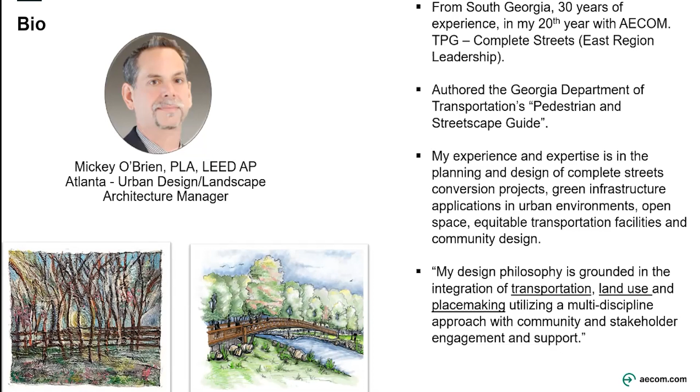and work with communities. So what is a complete street, right? I'm going to just cover a couple of definitions. The US DOT definition is streets that are designed to enable safe use and support mobility for all users. This includes people of all ages, abilities, really all people trying to get from point A to point B.

But I like the National Complete Streets Coalition definition, which is really an approach from the beginning of the planning through the implementation of a project. So you want to be thinking of all users from the very beginning, not just the old paradigm of cars, cars, cars, right?

Even in smaller towns and rural America, across the country, the federal government is funding projects in all types of areas, not just urbanized areas, to develop equitable transportation facilities for all users. Not everyone wants to own a car, not everyone can afford to own a car, and not everyone wants to drive a car. So there is federal money out there, but my point here is it's an approach - thinking of all users throughout the process.

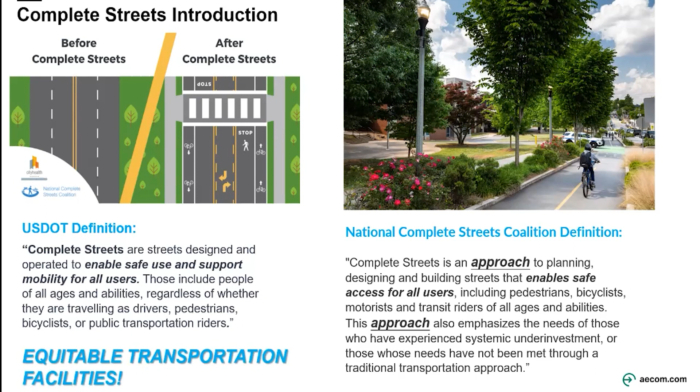Okay, so again, the approach in the process here - is this screen in the way of y'all at the bottom? Okay, there we go. So when developing a Complete Street, you want to evaluate the context, right? As I was saying, land use and transportation work hand in hand, or not. In the past, I think we've missed the bullseye more than we've hit it. But not all streets are created the same, or roads, right?

I mean, we wouldn't be looking at a complete street or a complete road on an interstate, right?

And if you're in an industrial area, you might have a different approach. You've got more trucks and things of that nature. So you need to still provide these accommodations, but you might want to address them slightly differently depending on the context you're in. Industrial, rural, there's an urban context, and there's an urban core context, which is more of larger cities.

You want to conduct your due diligence with your client on the plan developments within the project area, because really all of that feeds into the traffic forecasting. And these projects typically are community driven, community supported, and they're for the community. So you really need to engage the community early on.

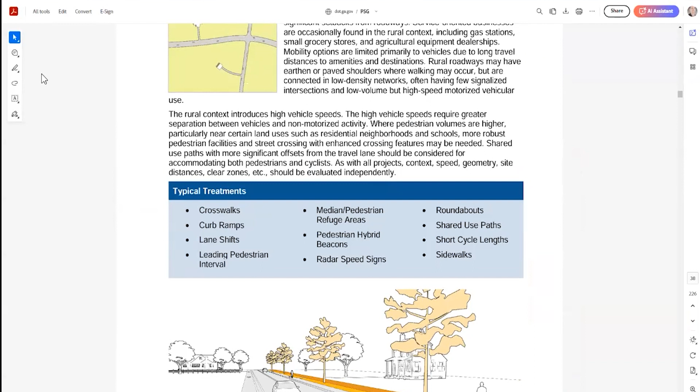And just for a second, I want to show y'all this document here. If you go to Google and type GDOT pedestrian streetscape guide, what you're going to find is this document, and it provides great guidance on the initial steps of creating these multimodal type facilities.

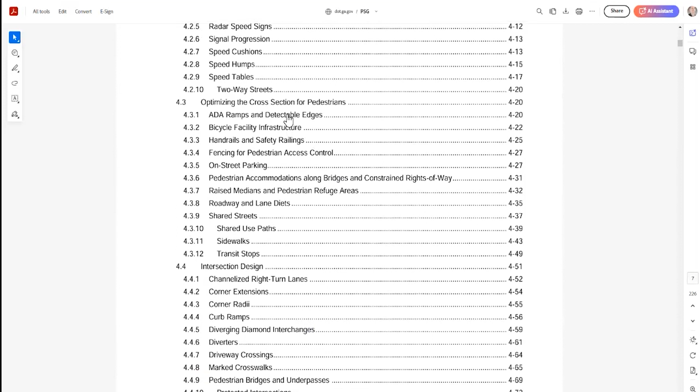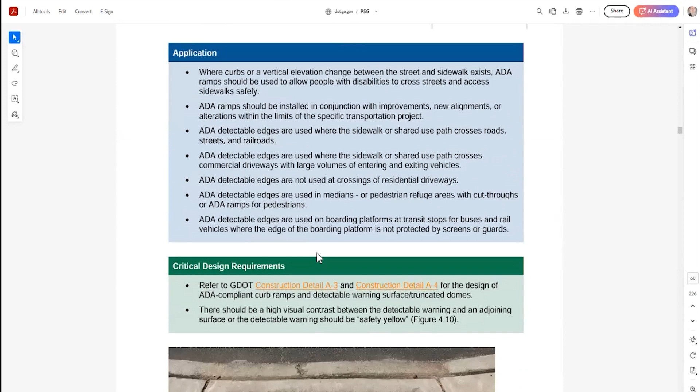But this is a great document. It's got hyperlinks in it. Additionally, Sheena reminded me that you can click on, let's just say, I want to find about ADA ramps—if you click on that, it takes you straight to it. There's additional hyperlinks embedded in there, for critical design requirements and things of that nature.

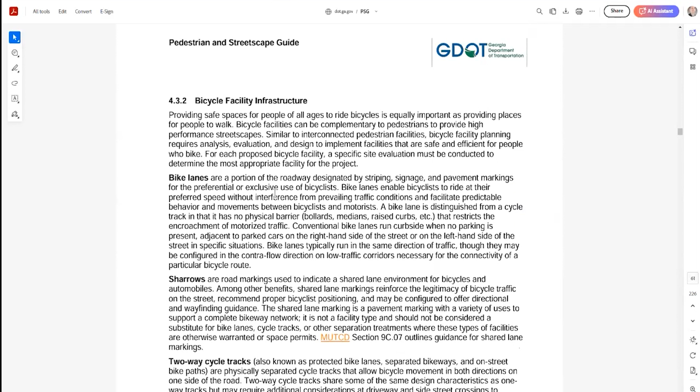And then this next chapter talks about bike lanes, sharrows, two-way cycle tracks. I believe the gentleman is on from Darts.

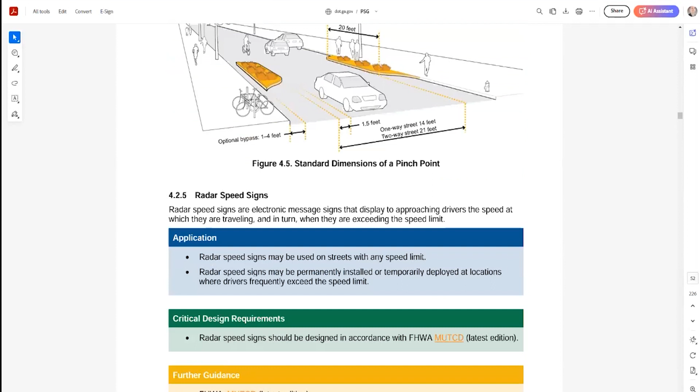So if we go back to the table of contents real quick, and then I'll move on from this. But we can go to transit, and let's see here. Trying to go to the next one. I'm sorry, the next one here.

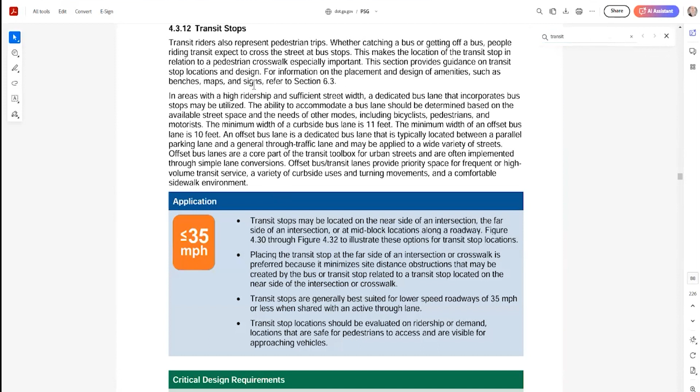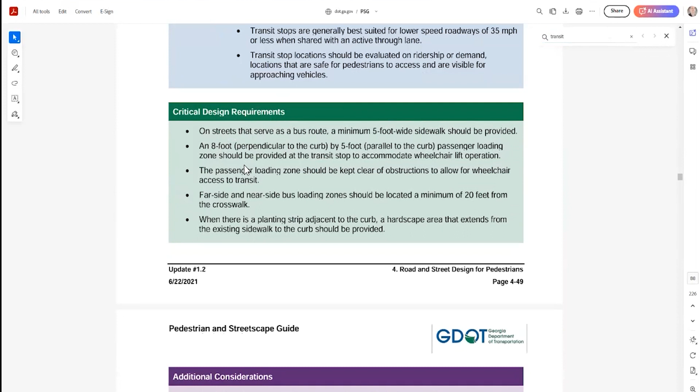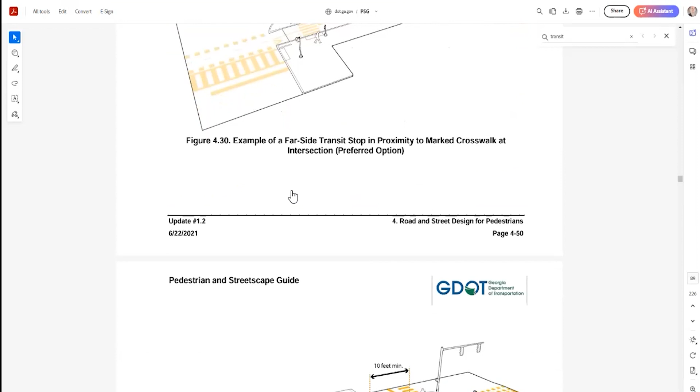Transit stops—okay, so you click on that, and it gives you initial guidance on transit stops: the application, the typical speed limit where these were at, critical design requirements, and near side and far side stops. So I just wanted to point this out, and then it gives you references to other more detailed information in here. Great guide to help you with your projects—a good first step. Back to the PowerPoint here.

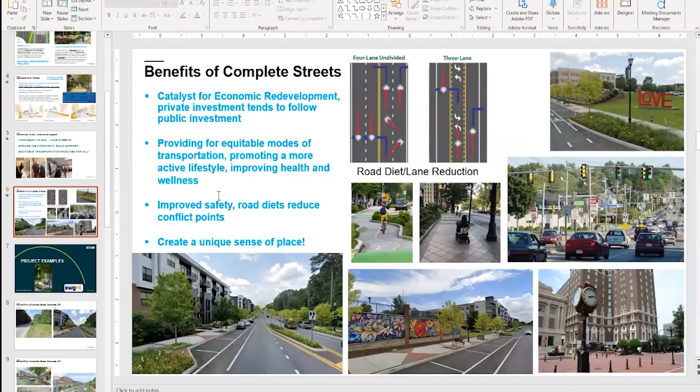So let's go back here. Sorry, here. All right, so once you have developed your project, or the community has said, hey, this street feels dangerous, and it has a history of crashes, then you've got the seeds of a project started.

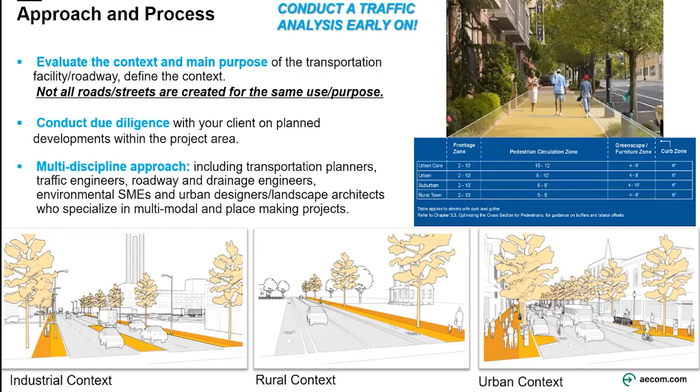But you want to conduct a traffic analysis early on, because a lot of times these complete streets might be a road diet or not. They may require some right-of-way to accommodate pedestrians and cyclists in a safe manner.

All right, so as I mentioned, it's usually community driven, community supported. It's your right-of-way and your streets—it's your taxpayers, your dollars at work here. So we want to make sure that we design it the way the community would like for it to be designed, with professional guidance along the way. These projects do not move forward without community support and stakeholder support. At the end of the day, we want to provide equitable, safe transportation facilities for all.

So what are some benefits? They can be a catalyst for economic redevelopment. Private investment tends to follow public investment. This picture in the bottom left corner is in Suwanee, Georgia, a small town of maybe 11,000 population. We converted a road into a street. The developer said this project was the reason he invested $150 million in new

multi-family and commercial development, which you see on the bottom left here. We talked about providing equitable modes of transportation, promoting an active lifestyle, improving your health and wellness, reducing conflict points. We'll get to that here in just a second.

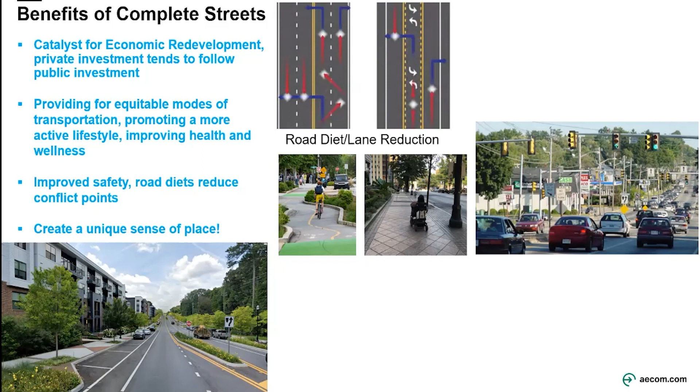And then also you want to create a unique sense of place. Now this picture on your right, is that unique? Not really, that could be anywhere in Georgia, or anywhere in the South, probably anywhere in the country, but I don't see cactuses or anything like that. But this is more what you want.

You want to engage the community, involve them along the way, the artist community, dig into the history of your community, and weave all of these cultural elements together so that when people come visit your town or city, they can leave with a memorable experience and learn something about where you live. It also promotes civic pride because taxpayers see that their tax dollars are actively at work, and it creates a memorable experience for visitors. So engaging the art community and celebrating the rich history of your area is vital.

Everything that goes underground, utilities and things, people really don't notice until they can't flush their toilet or turn their water on, then the phone rings off the hook. But people do really remember what they see and experience.

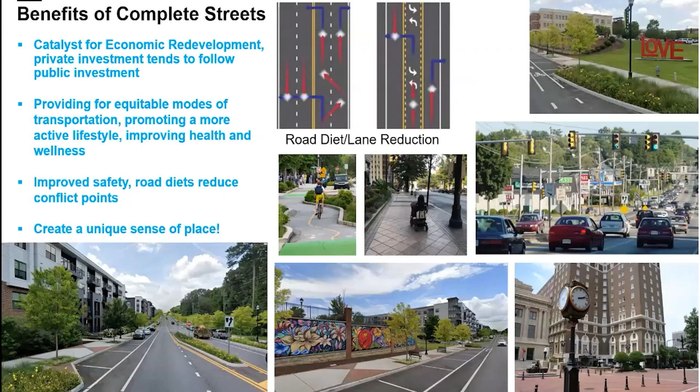Right, so back to some project examples here. We talked about Buford Highway earlier.

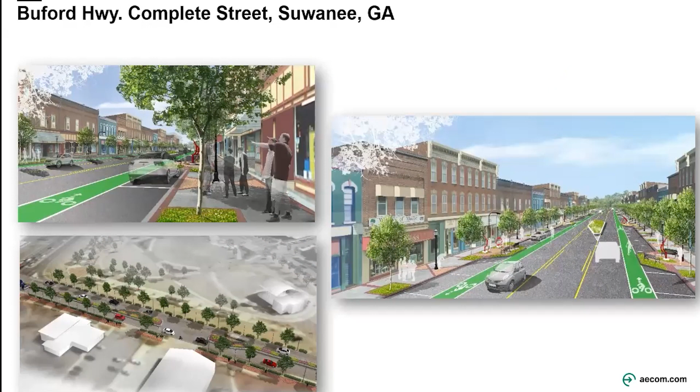These were some conceptual drawings that we developed before it was implemented, working closely with the community.

Another project I want to touch on is Emory Village, at the entrance of Emory University in Atlanta. You can see on the left the existing conditions—it was like an octopus, but with only 5 legs, and it was still very intimidating. Students didn't want to cross the road, and the businesses, although at the front door of Emory, were vacant.

We worked with the community and developed a vision, which you see on the right. This project opened, and once it did, the businesses got new coats of paint and their vacancy rates dropped. Private development typically follows public investment, and I've seen it over and over again.

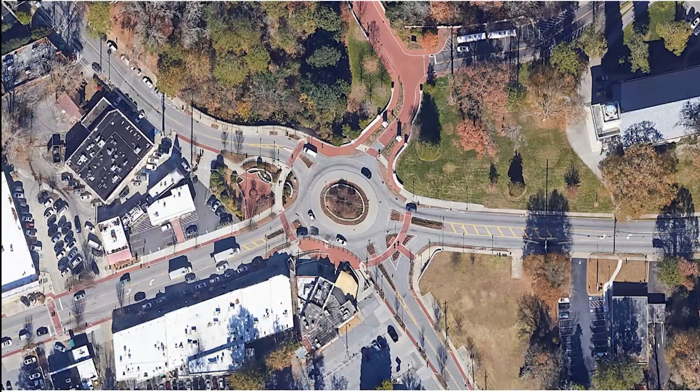This is what you see today, looking down on that same intersection. We created a pocket park right there in that corner—if you look right there, you can see it, and you can see the before and after. So you want to look for opportunities to develop things such as pocket parks.

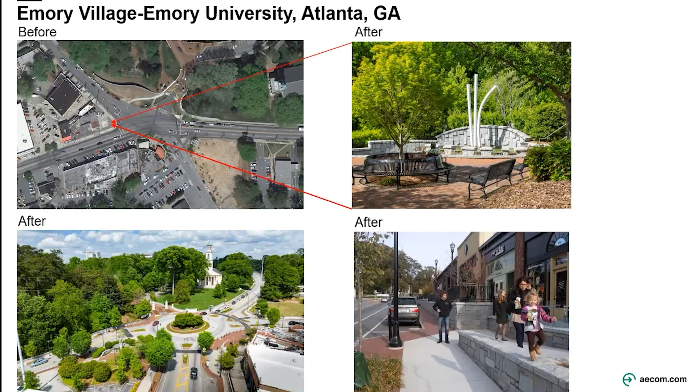At the end of the day, you want people out on the streets—people watching, catching up with a neighbor or an old friend rather than just blowing your horn and waving. There's a social aspect to this, and it's very important for mental health as well as physical health.

On your left you'll see the existing conditions up top. We had angled parking, cars pulling up, and about 4 feet of pedestrian zone, with cars backing out into traffic—it was always a nightmare, and it was up on a hill.

We worked with the community and business owners, got rid of the angled parking, and provided parallel parking, which you see on the right, creating a pedestrian retail promenade. That helped activate those buildings with ADA access—you can see the ramp that runs up there. So again, it's not just about looking at the road, it's looking at the land adjacent to the roads. That's very important.

On the bottom, you can see the remainder of the existing gas station area right at the tip, and we turned it into a pocket park. Those white vertical elements we turned into a sculpture - those are actually old trolley lines that were found when this project was being constructed, and we incorporated them into the pocket park, giving it some unique identity.

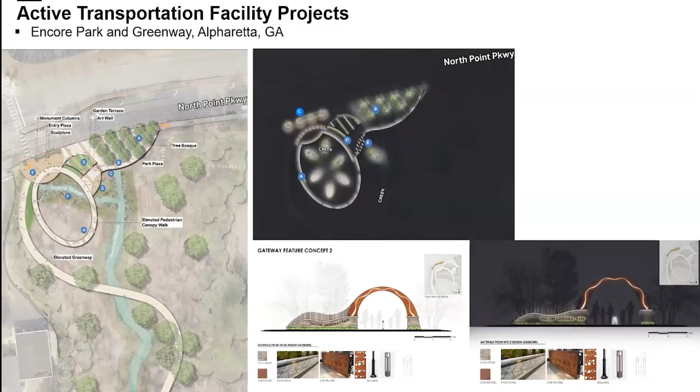Just as Mickey said, I want us to look at it from that angle. He just showed us something about how the transformation of those areas can invoke economic development. And I know one of the challenges that rural areas in the Southwest region are facing is financing, funding to do projects. And we can make our city more beautiful, more attractive, which can call for investors to look into our communities.

Some people just love a quiet area, the quiet environment, but there are basic things they would love to see. They want a safe community. They want a community that's connected together to places, whereby you can reduce the number of vehicles on the road network. People can make use of other alternative transportation. People on wheelchairs can go on their motorized wheelchair to the nearest convenience store to do whatever they want to do. They don't have to depend on a second or third party to do whatever they want to do.

With that being said, I want us to view it in a different way. Mickey may have shown us a bigger project, but it doesn't necessarily mean you have to go into that big picture of a project. You can have a smaller version, replicate what you're seeing in your community. That's right, Kay. It's scalable, right? So depending on the needs, like they say, you need community support. This is a community-driven project.

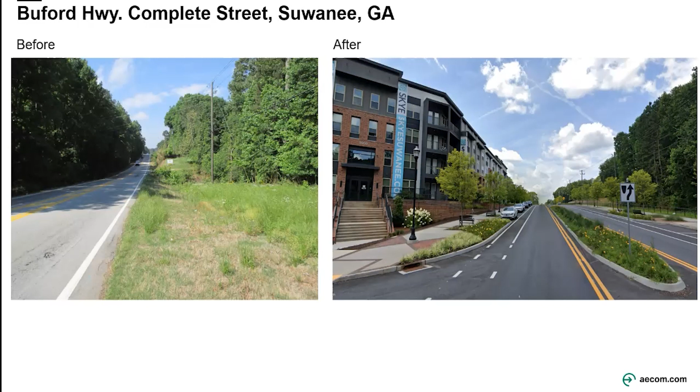That's right. So that's what, yeah, everybody, when you go to any city in any part of the world, you want to go to the downtown. The downtown will be the center point of focus that I want to look at, how the downtown looks like, and I just want to see what's going on.

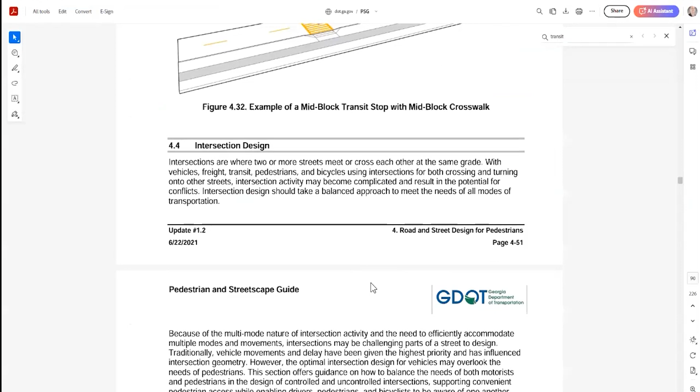And when you get to the heart of the town, it's so quiet, nothing. It might be quiet, but you have safe facilities. This is a suburban area, a rural context, but at least someone can get to and from.

If this was in Southeast Georgia, where I grew up in Waycross, I'd want a lot more shade out here than what I'm seeing. But I think you get the message. Without this facility, this is only for cars, so by putting it in, we've made it a more complete street.

So the idea is to chip away from the old paradigm that roads and streets are just for cars. There's a couple of things I want to mention here.

Investigate with your municipality: have you adopted a complete street policy? That's something to look into. Basically, when we're evaluating roads, worded differently in different circumstances, we're not only looking at cars, we're looking at all users and safe facilities for all users. So encourage your elected officials to adopt a complete street policy, and also a vision zero goal, where there are zero deaths associated with your transportation network within your city, municipality, town, or community. Work with your elected officials to get those in place.

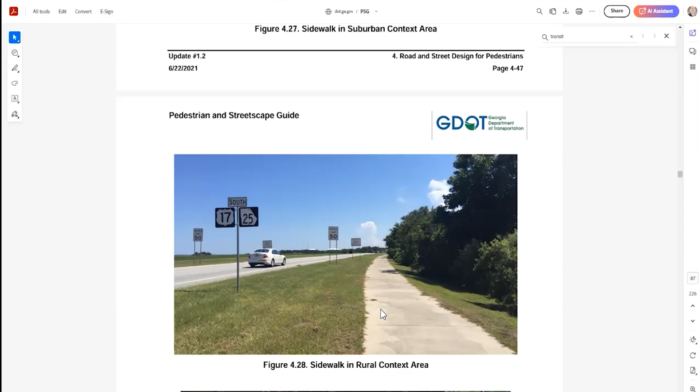Another thing I want to add is, I know in the Southwest region of Georgia, a lot of subdivision communities don't have sidewalks. I don't know, maybe the subdivision regulations don't compel them to have those sidewalks. And if you look at this neighborhood or subdivision, most of the time you see people making use of the side of the road, walking in the morning.

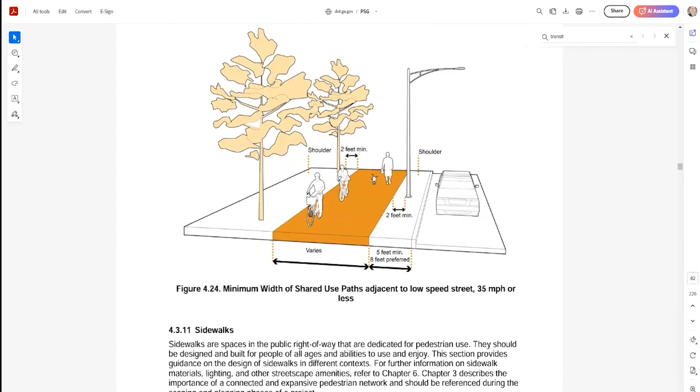It's kind of like the pedestrian fighting with other road users, like the motorists. And you have to be careful as the driver, because the part that they are treading is not that safe, but they just have to make use of that space to go back and forth.

Personally, this is my opinion, I would like to see changing the paradigm of just letting subdivision builders build houses without a sidewalk. Because once you have a sidewalk established in a subdivision, the city can connect their own sidewalk plan to those subdivisions, and this connectivity can go around.

So you're walking out from your subdivision without using the main road, but using the sidewalks or pedestrian facility, and connecting to places, to walks, to convenience stores, safely.

And you mentioned something we could touch on for a second, Kay, and that's destinations, right? We all know about Safe Routes to School, or if not, research it. Schools are great locations to make sure you at least have safe pedestrian facilities connecting to them. I've worked on a number of projects from large scale to small, inexpensive ones, but I'll tell you, recently I did a project here in Georgia.

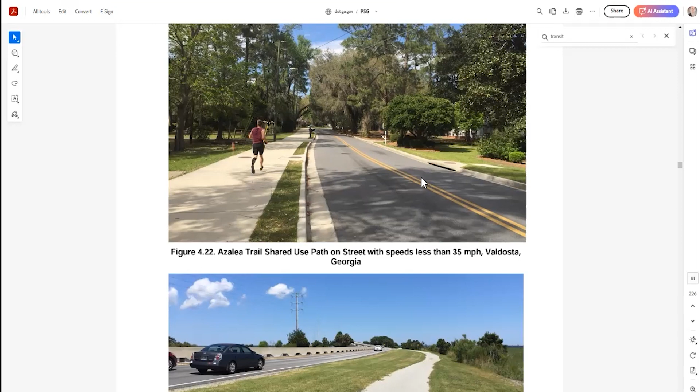So schools are great locations to look for, and major employers too, whoever that is, making sure they have equitable transportation facilities to get there. Destinations are very important. We've got one here from Valdosta, Georgia, the Azalea Trail Shared Use Path. I actually spent a year down there in college. But at any rate, finding these opportunities could start with you, and then you could garner support from the community, and then you've got your project. Having the community behind it is important.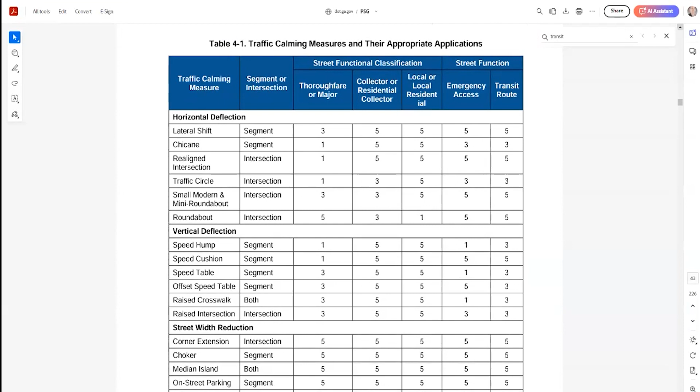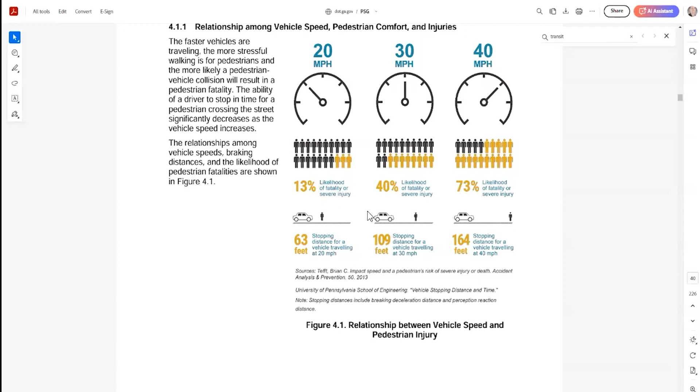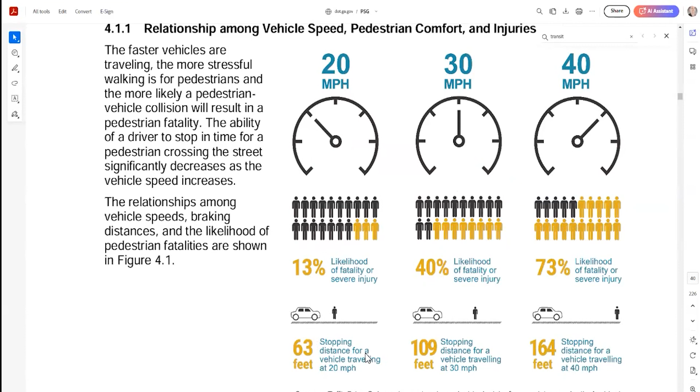One thing I wanted to point out here is based on historical data. Let me enlarge this a little bit. If a car hits a pedestrian at 20 miles an hour, there's a 13% likelihood of fatality. Once it goes up 10 miles an hour, it jumps significantly to 40%, and another 10 jumps up significantly again. It also shows stopping distances here. There's a ton of really good information in this book that I want you to utilize.

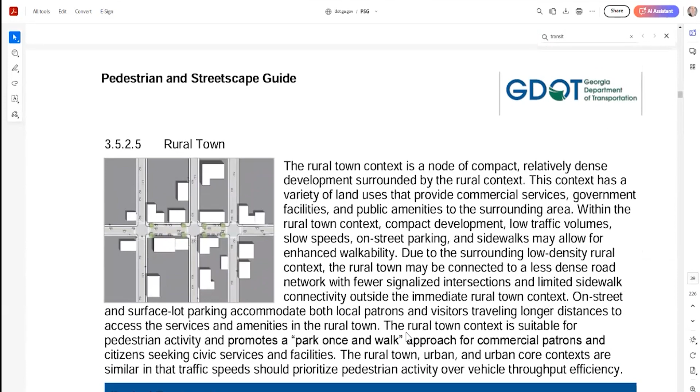A rural town, right? At any rate, I really appreciate your time this morning, and all the best with your projects. Please reach out to Kay.